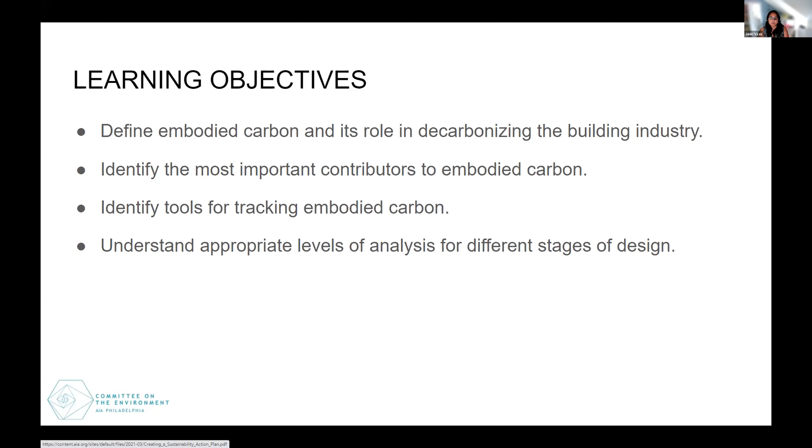So we have 3 speakers today. We're gonna give 20 minutes for the embodied carbon 101 section, tools for tracking, and then we have a series of project examples that help illustrate how to get started with embodied carbon. And then we're going to leave the last 15 minutes for questions and answers. So if you have any questions, you can put them in the chat box at any time during the session, and we will do them at the end.

So our speakers today are Stephanie Carlisle, a senior researcher at the Carbon Leadership Forum. We also have Kayleigh Houde, who's an associate and computational community leader at Buro Happold, and she's going to be presenting the BHoM tool, which is spelled BHOM. And lastly, we have Devki Desai, who is actually a structural engineer at HOK. And with that, I'm gonna stop sharing.

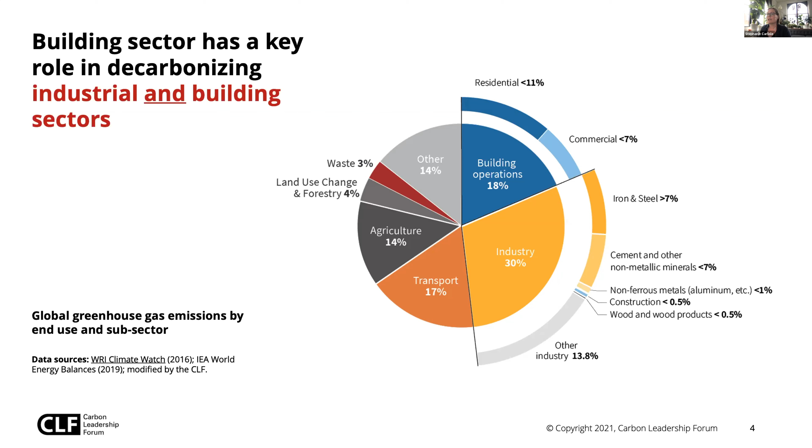Reducing embodied carbon is also urgent, and we really don't have any more time to be taking these emissions for granted. So while architects have long focused on reducing operational energy of their projects, and hopefully now are paying much closer attention to operational carbon and fuel choices more broadly, embodied carbon has really been pretty overlooked by most practices. And I think for a lot of designers, this is a fairly new topic.

But it's simply the case that in order to meet or even come close to any global targets of holding off 1.5 degrees of warming, or even 2, 3, 4 degrees of warming, we must reduce those embodied carbon emissions immediately. So not in 2050, not at the end of our building lives, not after years and years of energy reductions, but immediately.

So it puts extra pressure on this question that often is talked about as the timescale of carbon. The concept being that emissions we put into the atmosphere right now matter a lot, and arguably matter much, much more than emissions 10 years, 20 years, 30 years out. So I don't mean to say that operational carbon is not important. It is, and it is essential that we get the energy consumption and the resource use of our buildings down.

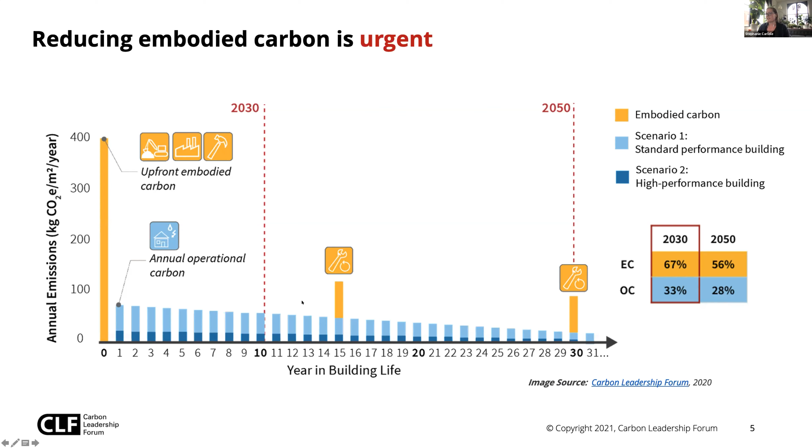Third, I just really want to underscore that embodied carbon is also a really, really important climate justice issue. Embodied carbon disproportionately impacts frontline communities, poor communities, communities of color. When we work to reduce embodied carbon, we're also working to eliminate the environmental and public health burden placed on frontline communities that suffer most, both from the global impacts related to climate change and the local impacts related to fossil fuel use in transportation and manufacturing across the construction supply chains, like smog and diesel emissions. So whether American communities or global communities in American supply chains suffer, we're accountable for those negative and sometimes deadly health climate impacts as well.

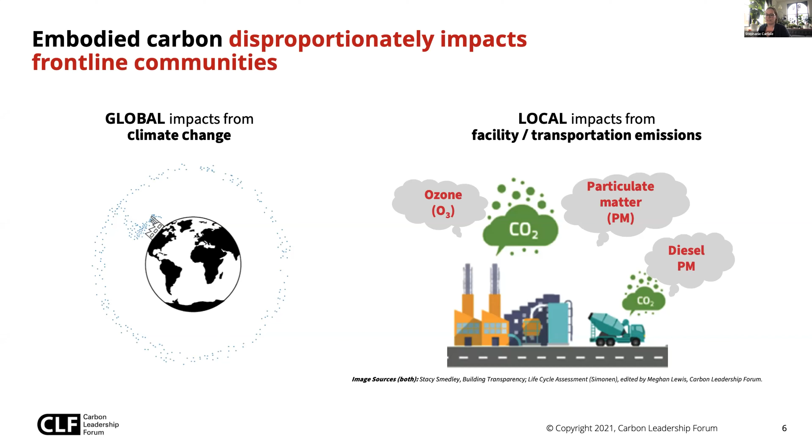Luckily, there are a lot of strategies at our disposal and a lot of things that you can do on every single project that you work on to address embodied carbon in your work. On any given architectural project, you have the ability to make use of and explore all of these strategies that I think we're going to touch on today in the different project examples you're going to see. I break them down here into 3 main buckets. They're a little squishy.

You could break this down a number of ways, but you can think about first ways that you might optimize for carbon on the whole project. So these are questions and thinking you're going to do generally pretty early in a design project, and that's making use of strategies like really just using fewer materials. So building and material reuse, reduced floor area, design for disassembly, thinking about what the flows in and out of the project are. And we could put that under that category of building and material reuse or right sizing.

Second, we have a whole bucket of categories around optimizing the systems and construction typologies. That's where we're exploring alternative materials, so low carbon materials like bio-based products and assemblies, as well as, again, thinking about the material efficiency of what we are actually building with. And generally, we're going to be making use of whole building life cycle assessment during that phase to explore those types of strategies.

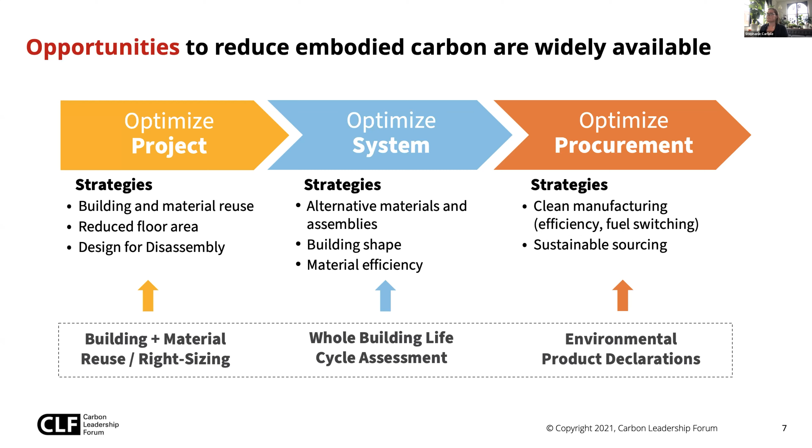I don't have time to, and I hope that in another session we can really talk about policy and how this is spreading across the whole industry and the whole country. But I just really wanted to touch on the fact that in North America, there is a growing body of embodied carbon policies that are requiring reductions in embodied carbon on projects.

So we really hope and encourage that architects and engineers and consultants can really take leadership on this topic. But it's important to know that if we don't, we will largely be regulated into this. So there's a lot of different approaches that are being pushed and a huge amount of momentum that's growing in terms of figuring out how to really compel design teams to address this area, because the voluntary pathway hasn't really been working, to be frank.

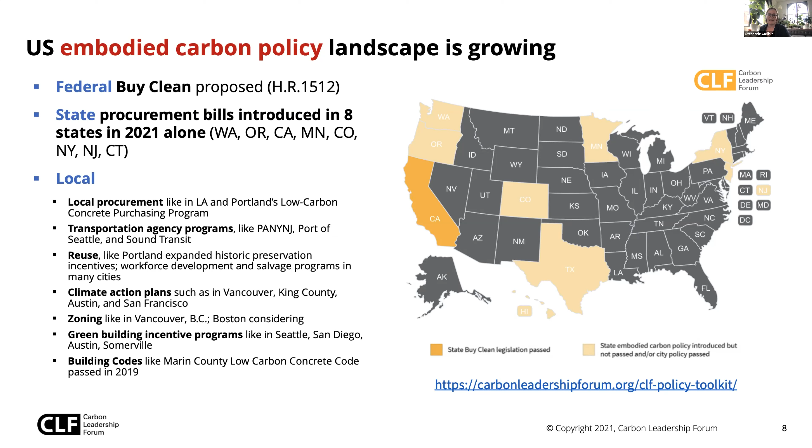But in general, we could break down these different strategies, and I think we're going to cover both of these with all of the speakers today. I generally think of a building approach, which uses whole building LCA tools or early design estimators, and a material approach. If we really want to simplify it, and it's really not an either or. I would encourage project teams to start thinking about which one they can make use of, which tools can support these workflows, but also how to make use of both, and which strategies are really going to empower you to make a difference on your actual project.

Whether that is embracing low carbon concrete specifications and writing those into your design documentation, or doing early phase analysis and comparative analysis and really making perhaps even more significant embodied carbon reductions on your project. But I think both are really valid, and both are things that we're going to address on this call today.

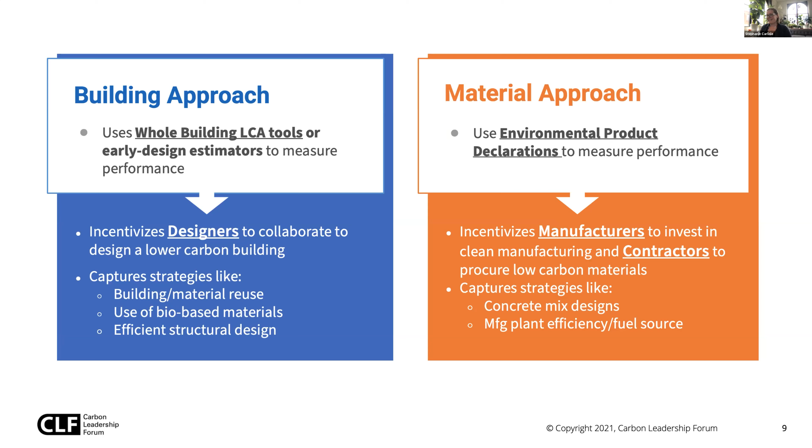Okay, so that is a very fast overview of what embodied carbon is, how we talk about it, how we report it, and getting some of the terms out of the way. So I now want to spend just about 5 or 10 minutes talking about life cycle assessment. So how do we actually measure embodied carbon? And what is actually happening in these software tools? Where does the data come from?

So the way that we talk about and evaluate embodied carbon on design projects, as well as across lots of other industries, is a practice called life cycle assessment. Life cycle assessment is an analysis practice. It's been around for about 40 years, so it's not new, but it's quite new to our industry and the design community. So LCA, what's happening within these models, is an evaluation of all the inputs, outputs, and then the potential environmental impacts of a product system across its whole life cycle.

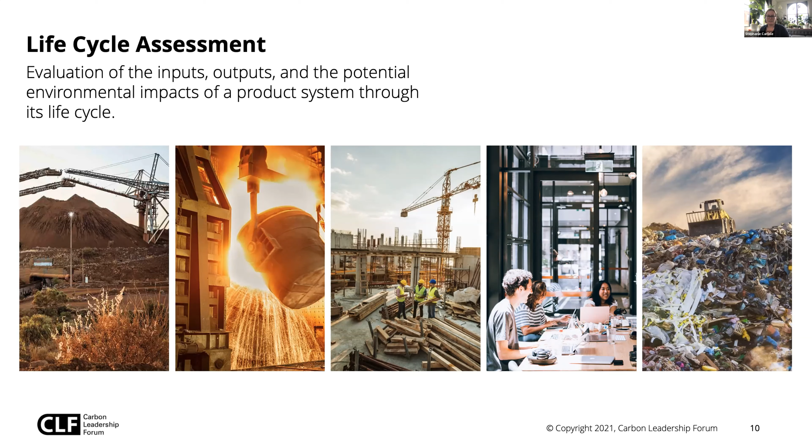So like I said before, that's going to start all the way at material extraction, look at manufacturing, construction, use, replacement, et cetera, and then also allow users to think about end of life, design for disassembly, material recovery, et cetera. So another way to think about that whole process is what we call life cycle stages. This also is a really good vocabulary to start getting comfortable with, because it's how we report carbon across a building project. So we tend to break up these models, and all of the tools that you might use will do this a little bit differently, but we'll use these standardized life cycle stages, which are set by the ISO standards.

And you'll start seeing these terms when you're looking up embodied carbon data. So material manufacturing, that sometimes people use the shorthand of A1 through 3. That's generally what is covered by a lot of environmental product declarations. And we would tend to refer to those as cradle to gate assessments.

So that's just going to look at how is this material made and what were all the impacts associated with it up until it leaves essentially the point of sale. So this is not including the full life cycle of the product. When we move into a cradle to grave assessment, we're really looking at all the materials, energy, water, all of those impacts associated with this full life cycle.

So that would include construction, it would include use, end of life, and then this lovely category called Module D, which allows us to think outside of our individual projects. And you take all of those inputs and outputs in the model and then think about and allocate the different impacts in terms of their emissions to soil, to air, to water.

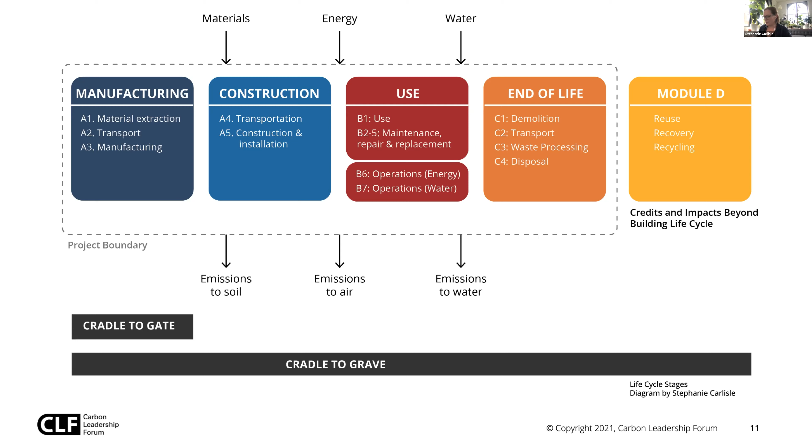And in general, underlying these different processes is some pretty simple accounting, right? But the devil's in the details. So what you're really doing is gathering an inventory of all the materials in this whole building or a product or assembly, multiplying it by the impacts and getting a total of environmental impacts. So sounds simple, but when we think about the complexity of how buildings come together, this form of accounting is obviously much more complicated.

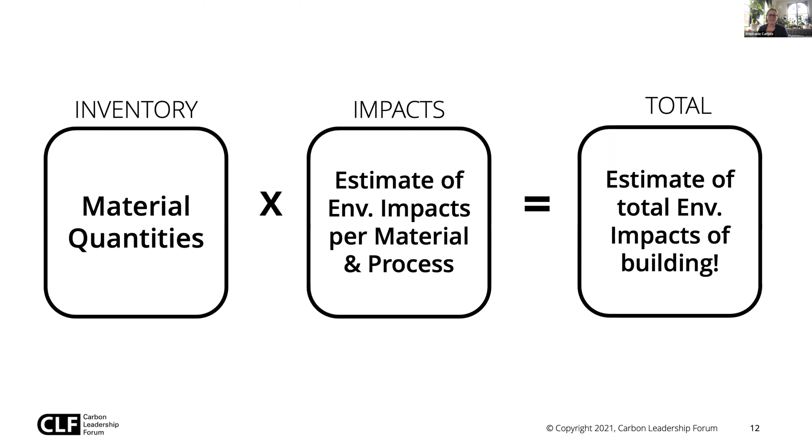So just to walk you super quickly through what's happening in the background of a lot of these data and tools that the other presenters are going to talk about is really this process of inventory and impacts assessments. So the first step is kind of moving from chemicals to materials. The diagram on the screen is giving an example of how we track in the background data all of those different processes that go into making what look like pretty simple products.

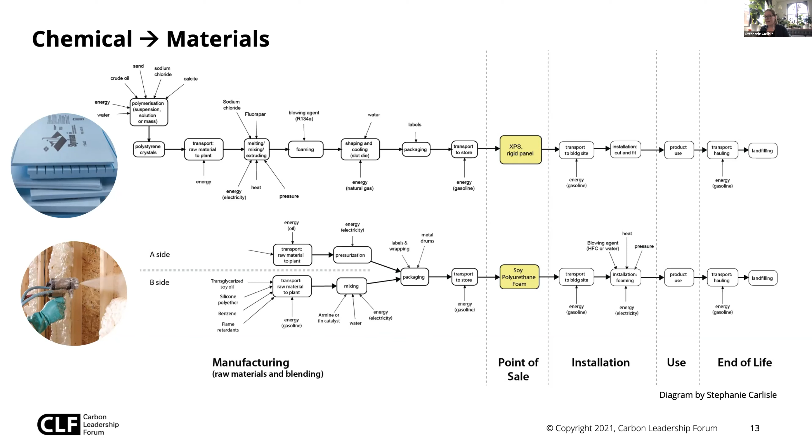So this is a comparison of some of the system processes behind an XPS rigid panel versus a soy polyurethane spray foam, for example. So it's a good example because it's one where the elements that are huge contributors to climate change or global warming potential can happen at different points, right? We want to make sure that we're thinking about those really, really carbon intensive blowing agents like R134a that are happening with the XPS manufacturing in the factory. But we also want to think about the blowing agents that are happening on site with spray foams, for example. So LCA tools are going to help bring all of that information together.

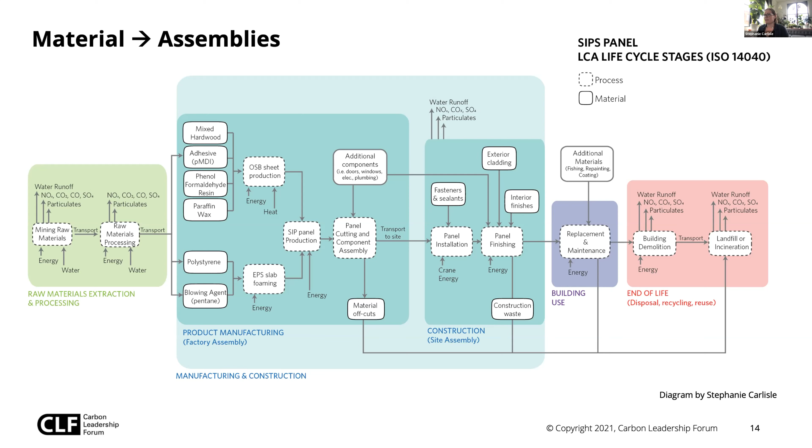The next step often is that we don't just pick materials or individual chemicals, but we're also thinking in terms of assemblies. So LCA databases and tools are going to help bring all of those different materials together. So this is a diagram of an LCA model built up of a SIP wall, pretty simple multi-material assembly. And similar to the way we can think of other types of performance, we're also going to start thinking about that in terms of the flows and all the environmental impacts associated with how all these individual materials come together.

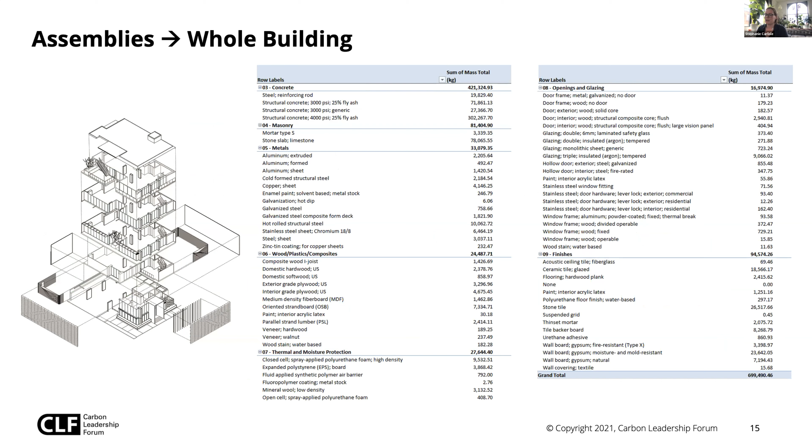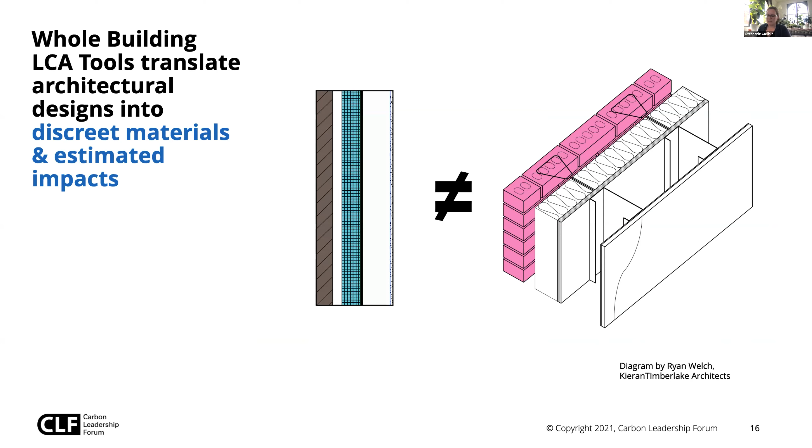And finally, when we're thinking about whole building LCA, what you're ultimately getting to by using design integrated tools really is getting accurate, quantified material estimates or a bill of material of all of the different materials coming together in your project, right? So fundamentally, what most LCA tools are doing is actually helping designers make that translation, right? Between the way we draw assemblies, the way we specify or think about assemblies, and all of the different actual quantities of materials behind them so that we can do robust analysis.

That's really the fundamental work of tools like Tally, of OneClick, or Athena that are going to help architects make those translations so that you can get environmental impact data right in your design tools and not have to be doing all of the background modeling or doing all of that quantification by yourself.

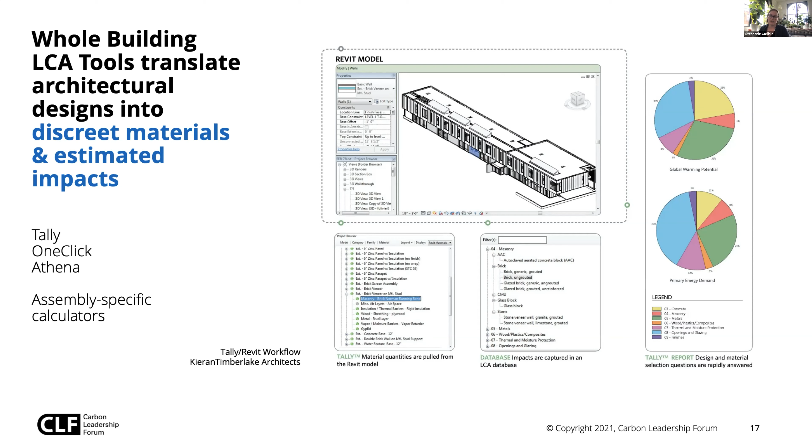So I think we'll show a couple different examples of what that looks like, but there is a really diverse range of tools that are starting to aim to meet every design delivery pathway and design process that designers are doing. Whether you're in an integrated Revit workflow, a Rhino integrated workflow, or working out of spreadsheets, hopefully there's a tool that you can start looking at embodied carbon in your projects.

And finally, I just want to mention, maybe this will come up in the examples or in the Q&A, one huge topic that folks are really grappling with when they're new to LCA is, what do I measure, right? A huge differentiation between different tools that are available also has to do with scope and the scope of assessment or the system boundary of some of these models. So some tools are really just looking at structure.

Many folks who are doing whole building LCA are extending that out to look at structure, at enclosure, at interiors, and other kind of elements that are starting to join the fray, like looking at building systems and MEP, site work, landscape, et cetera. So I think the practice of LCA needs to become more accessible through tools that are easier to use, but also tools that cover a much broader system boundary, because we really can't know which elements of our projects have the most impact or where we have the best opportunities if we're simply not measuring or modeling those building systems.

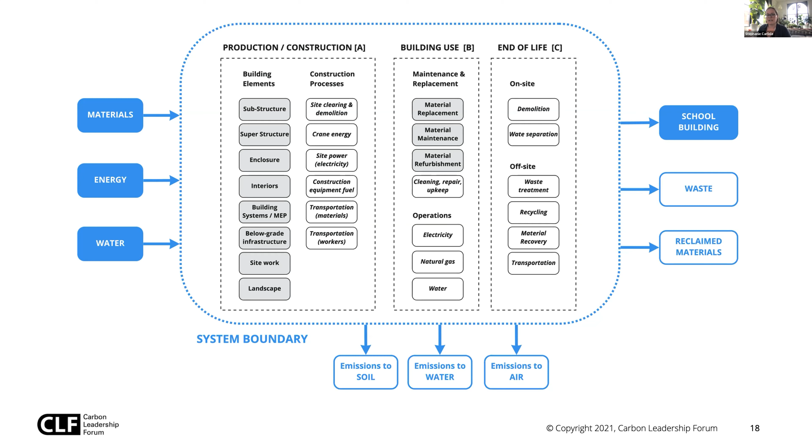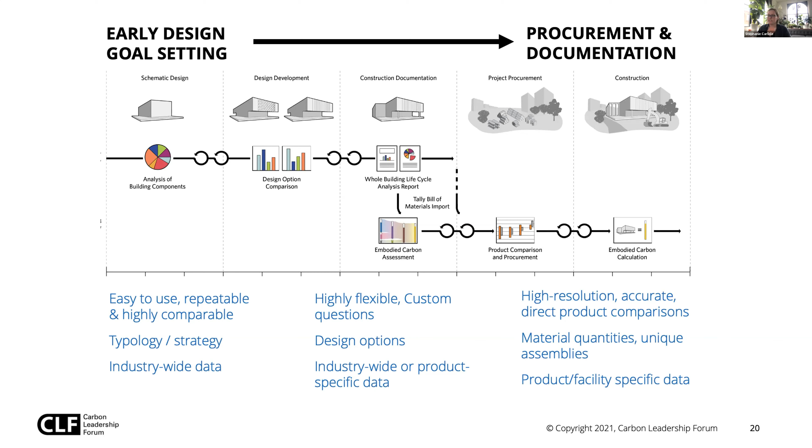And finally, I just want to end with this little breakdown of how really what we need to get to is a workflow in which embodied carbon questions are not asked at the end of the project, but similar to the way I think you're building a conversation in this group about energy modeling and other forms of analysis, something that tracks through the entirety of the project. Early on, you want to be using tools that allow you to set benchmarks, to ask questions really early in the design phase, to think about where you're going to have the most impact on your project, to do hotspot analysis.

During design development and construction documentation, you're getting much more detailed and thinking about optimization and really tracking all of those different trade-offs between embodied carbon and operational carbon, and then really hoping to get more and more practices to that space where they're taking those design models and analysis and putting it into the documentation for their project, making sure that if you have great ideas and concepts about embodied carbon reductions, that they actually get built, right? So that's really getting into that world of specifications, tracking, reporting, and disclosure.

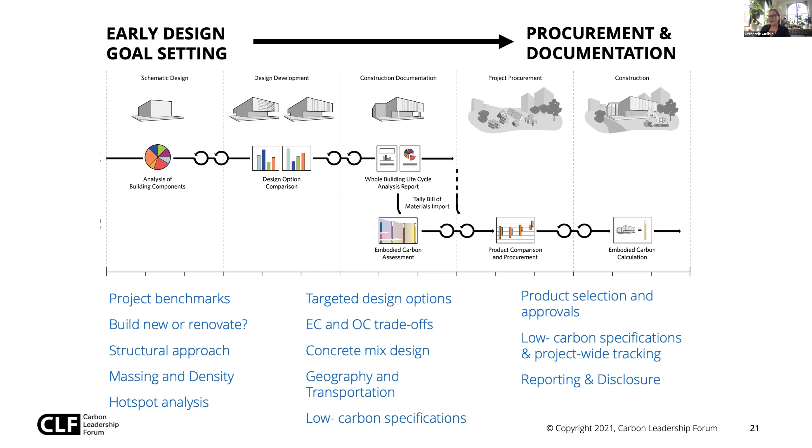All right. So Steph, great intro. And I think you actually listed more tools than I even have on the slides here, but there are more coming out every day. So as you saw on Steph's slide, there are so many different tools that we could potentially look to start doing LCA studies, but you might say, okay, so where am I supposed to start? What's the right tool for me? Hopefully we give a little bit of detail about each of these tools.

So some questions you might have is, what's the cost associated with the tool? Where does the underlying data come from? That's a really important question in this space. When in my project should I be using different LCA tools? Like Steph mentioned, it's better to do it at the beginning of your project when you can have the most impact versus when you're past CDs and you're just wrapping up analysis at that point. So better to do it earlier on. Some tools are better for that than others.

Which life cycle stages am I interested in studying? So like Steph mentioned, A1 to A3, that's usually what EPDs cover, but it's an important question to take into account. And which environmental impact categories am I interested in studying? Am I just interested in global warming potential or embodied carbon, or am I interested in all of them? So those are some of the questions that you may start off with.

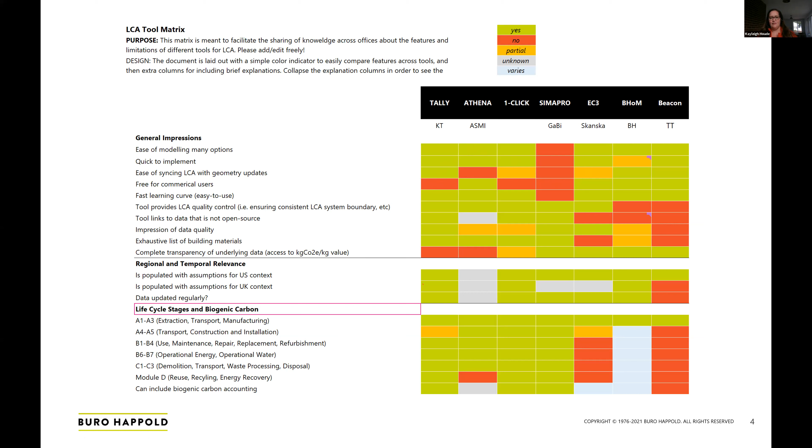And we tend to look at different decisions here in terms of where the data came from. Is it specific to the US or the UK, since those are our two main offices? Is the data updated regularly? Which life cycle stages does it cover? So this is just a bit of looking into how we choose to do LCA studies and looking at all the different tools.

But if we start to look at the macro level, one tool that's very close to home for Philadelphia, obviously, is Tally, originally created by KieranTimberlake, which is local to most of you, which is a great tool because it's integrated with Revit, which makes sense for so many of our workflows. It allows you average values with some customizability, informing those big picture designs on your project. So earlier and earlier, we're starting off with a Revit model, so it makes sense to have a tool that's sitting there to help you make design decisions, and it's very much a plug and play type of system. So Tally is a great one to start off with.

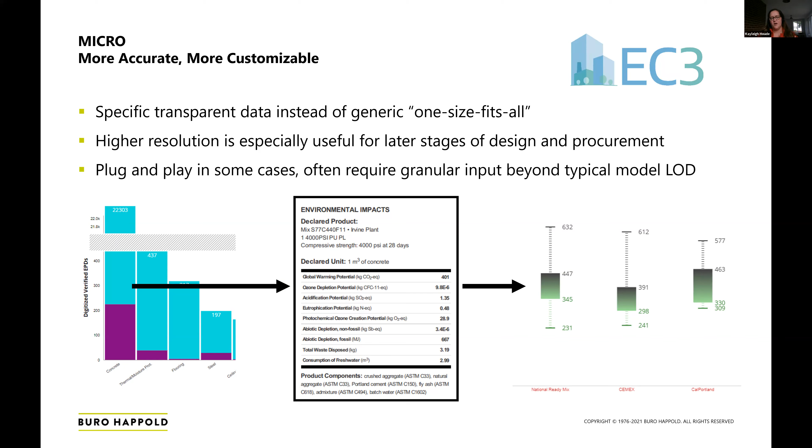Also, if you're interested in looking at more micro, object by object types of decisions, EC3 is a great one, recently integrated into BIM 360 through Autodesk. So this allows you to look at individual products. So it's very specific, and it allows you higher resolution of those individual cases, let's say one concrete versus another, one manufacturer versus another, but allowing you to see those industry average values as well as where the individual products fall, which is very useful.

Also, OneClick LCA, we actually see a lot of our UK folks use this tool in our sustainability and physics group. This allows you very specific data sets, a wide range of data sets, lots of different regional ones. I know there are a lot of French EPDs in there, but this one again is very much plug and play, very specific to the products that you're specifying, and it actually does include scopes like MEP, which is valuable.

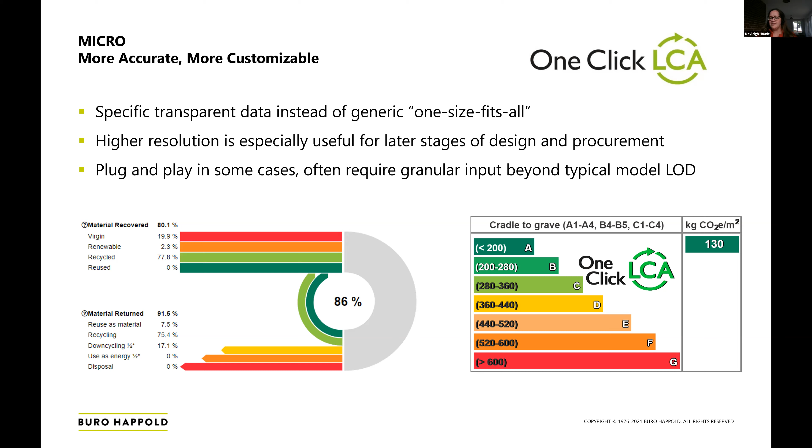But again, each of these tools takes a slightly different methodology on what Steph showed is a fairly simple calculation. It's just more a matter of what are you trying to study? What's the data that you're trying to look at?

And then BHoM, which is the Buildings and Habitats Object Model, is an open source tool that was created by Buro Happold, open sourced a few years ago. This is a fully customizable tool that's able to be used whether you're modeling in Rhino, modeling in Revit, or even you just have an Excel spreadsheet of your different quantities.

It's capable of accessing a variety of different open source data sets. So EC3, Ökobaudat, which is a German data set full of information, Quartz, which was a project by Google Flux a number of years ago. Lots of different types of data sets being integrated there, but it allows you very much object by object, you're seeing what you're attaching as EPDs.

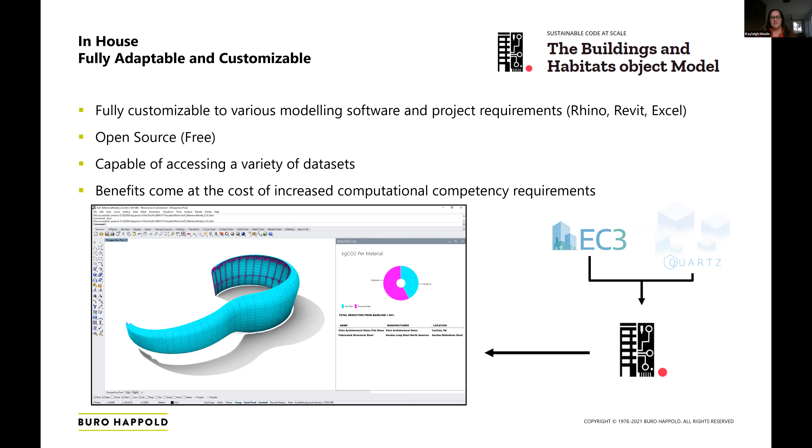The use of this tool in particular comes at the increased cost of computational competency requirements. So if you love Grasshopper, or you love Dynamo, or you're really interested in assessing an early stage Rhino model, this is the right tool, but I would say that it is more complex in some ways and easier in others. So I'm going to go a little bit deeper into how the methods are set up here, just so you can see kind of the underlying logic, which would be the case for any of these tools. But since this one is closest to home for me.

So what is BHoM? It's an open source, so free means of accessing collective industry expertise through computational methods. You'll see them as nodes in Grasshopper, Dynamo, or Excel. We have 30 software adapters that allow interoperability. So if you're trying to go from Revit to IES to do an energy model, there are interoperability forms of doing that. Adapters are what we call them. So that's part of what BHoM does. We also have individual toolkits like the LCA toolkit that allow us to solve wicked problems like climate change.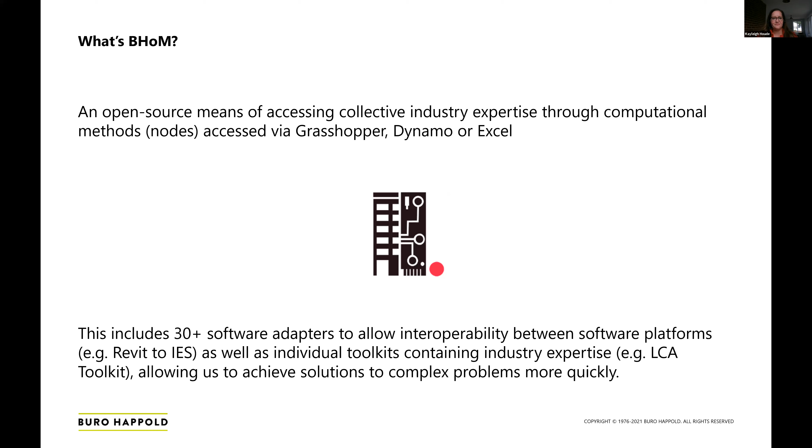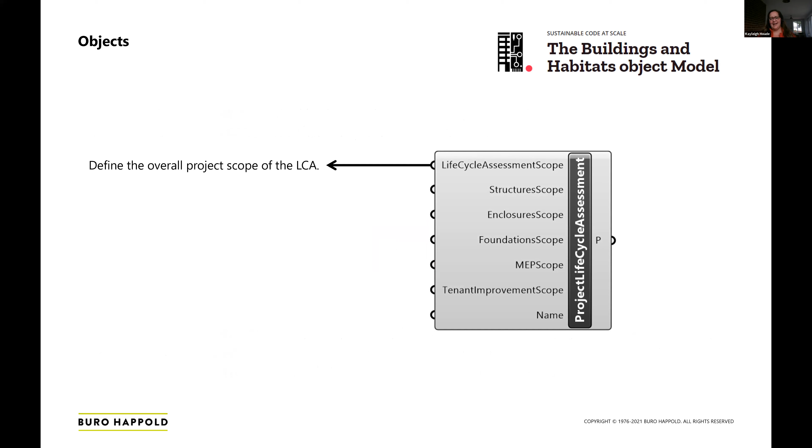So starting to look at what this might look like, please don't be scared if you hate Grasshopper or hate looking at nodes. But something like this is how we look at the whole project lifecycle assessment. So a lot of the times we were looking at these kind of benchmarking studies and saying, what level of LOD was that project that that benchmark was based on? And there wasn't enough data to give us that information, or where was the project located? What was the type of project? Those are usually included. But things like, which primary structural material did you have?

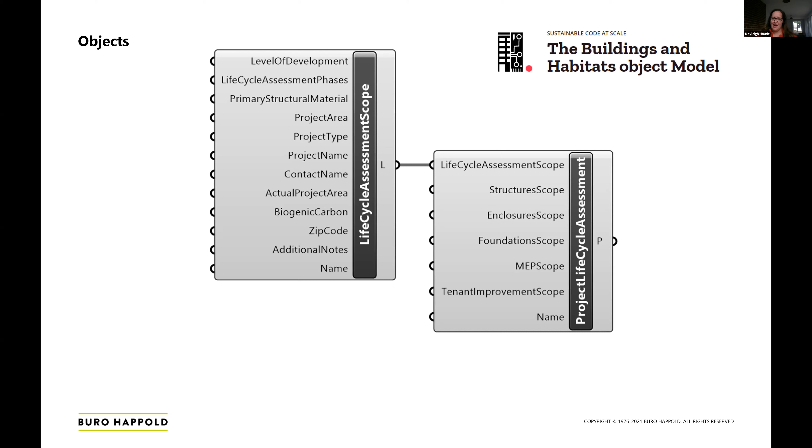A lot of those important questions, we tried to get those down into our LCA scope here so that when we were comparing projects later on, we would know they were apples to apples and you weren't comparing the wrong things. We also were very specific about the way that we were quantifying each of those different scopes of work.

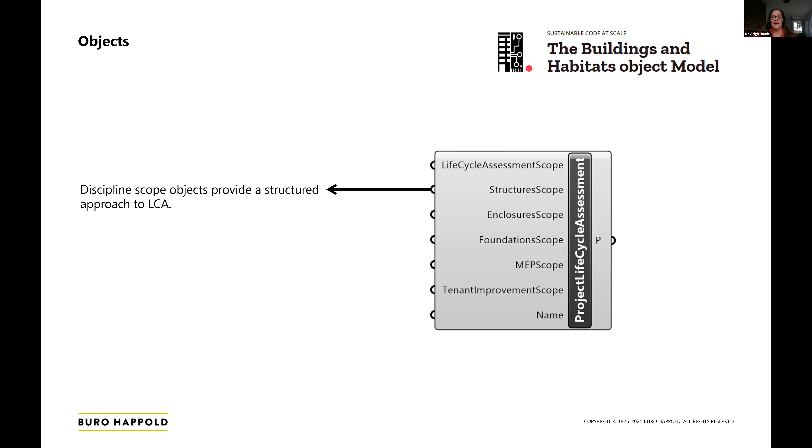So if you do an LCA study by the book, structures, foundations, and enclosures are kind of the top 3 bits, since they tend to cover, I think, the majority of the embodied carbon of the building. They're the highest mass of the building. So those tended to be focused on, and MEP and tenant improvements kind of forgotten about, but we have included them in our methods just because it makes sense to have everything there. If you have it, you may as well study it.

So for structures, slabs, core walls, beams, columns, easy. Structures, such an easy scope to be able to cover. You have so little to cover there, and it's so high in volume that it tends to be the highest embodied carbon. But then if you start to look at all of the different pieces here between structures, foundations, enclosures, MEP, and TI, you're seeing the rest of the building kind of come to fruition, and you can start to focus on other bits like ceiling tiles or finishes, and MEP looking at refrigerants and ductwork and piping. So being able to look at the holistic picture here. Again, we wanted to be very specific about what was included in these studies.

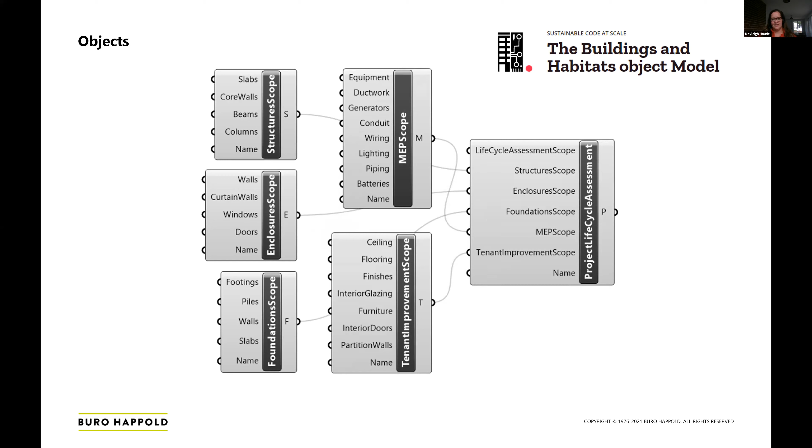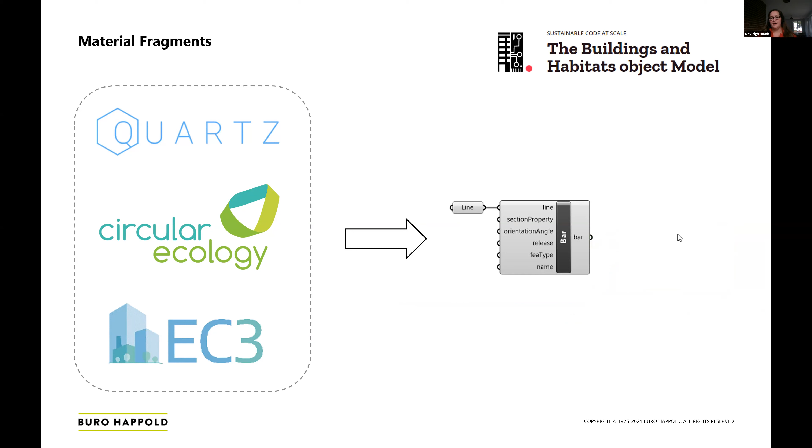And this is just showing you how you would actually start to have your objects, so something like a bar or a beam, and you're actually attaching the data, the EPDs, to the individual object. So this bar would be plugged in as an object here, and then the fragment that's attached to it, that is the actual EPD. So this is EC3 concrete, 0 to 2500 PSI in strength. So actually taking those objects in your model, so floor, column, a wall, a beam, a duct, and attaching the EPDs to them so that you can work with them through the rest of the LCA study.

Each of those EPDs is then broken down into a common language. So these are all the properties that an EPD usually contains. Each of those has a quantity type associated with it. Am I measured by volume, meters cubed? Am I measured by mass, just kilograms? Everything is in metric, which is nice for us all to speak one language, except for Americans. So a little bit of a learning curve, but that's kind of across all EPDs as a whole.

Also just looking at which life cycle assessment phases are covered, generally A1 to A3, because that's all the manufacturer can control. We also have things like descriptions, the amount of global warming potential, the amount of eutrophication potential, anything that was contained in the particular database.

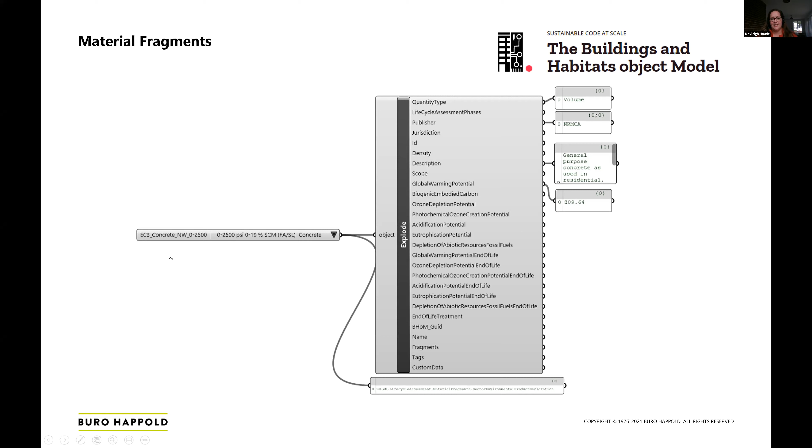And then you want to look at the level of granularity that you have on your project. So if you're really early stages, projects in the US, you have a Rhino model where you have mass-based geometry, applying something like the Quartz data set, which is really rough, regional, industry values rather than a very specific manufacturer's product. It makes more sense to apply that type of data set at early stages when you're comparing massing versus massing, or you don't want to get to the specifics of a particular type of concrete necessarily. You're saying concrete or steel, those larger picture decisions. So Quartz is great for that.

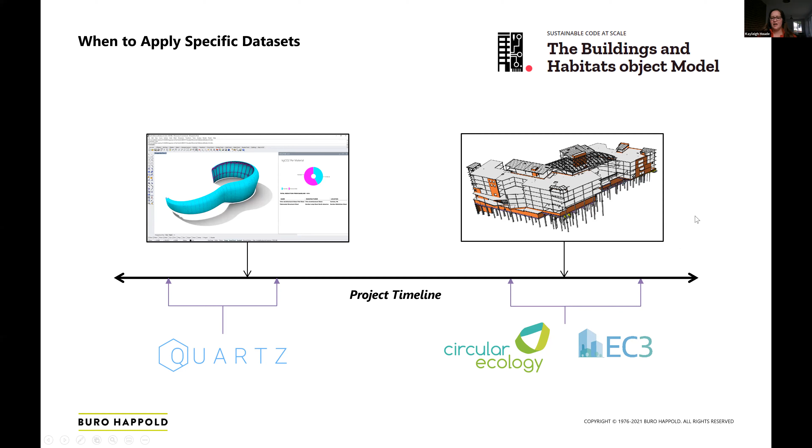And then once you start to move further along into DD and CD, when you have a more fleshed out project, using EC3 or One Click LCA, something like that makes a little bit more sense. So in terms of how you would actually assess the life cycle assessment, you can do that by individual object. So column versus column, one is bigger than the other, so it'd have more embodied carbon, or scope. So structure scope versus structure scope, or structures versus foundations versus enclosure. Where should you be focusing your energy and your decision making? And then finally, evaluating the entire LCA once you have all of those scopes pinned together.

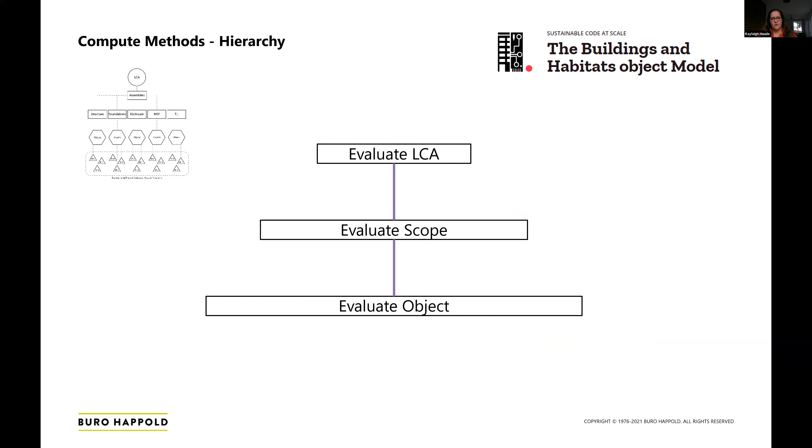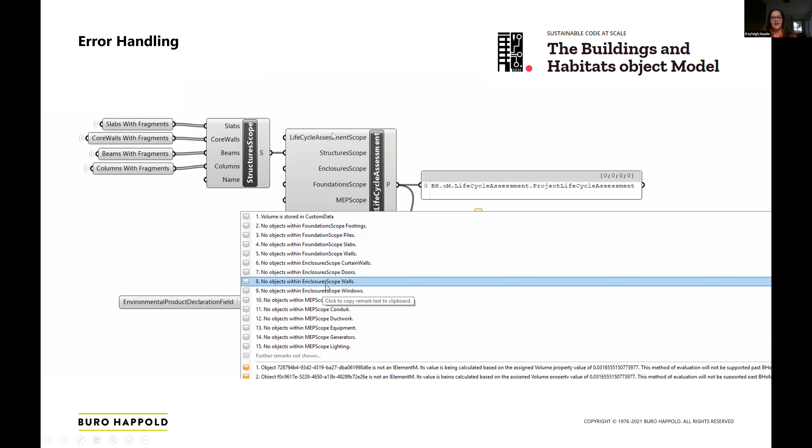So that's what these look like in the individual little nodes there. We also have lots of error handling here. So saying, hey, I didn't actually find any foundation scope piles in here. I didn't actually find XYZ, whatever you didn't include. So making sure that we're very aware of what we didn't have as a part of the project is really important. Again, when you're looking at benchmarks, it's important to know, hey, they didn't actually include their slabs for structures. I don't want to compare myself to that particular number.

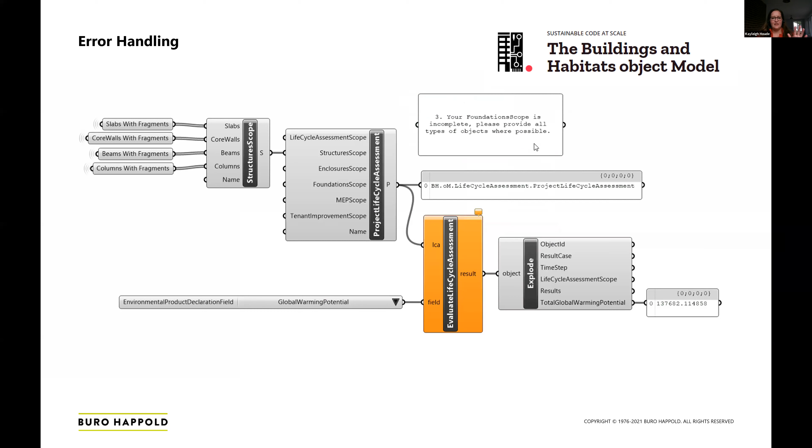I think we get so hung up on numbers sometimes as an industry and saying, well, what am I comparing this to? Well, you want to make sure you're comparing it to a similar size project, similar scope being studied. So if you did include MEP, you don't want to be penalized for that. So when you're comparing to another project, maybe don't include your MEP scope, something like that. But just making sure that we're aware of what can be included.

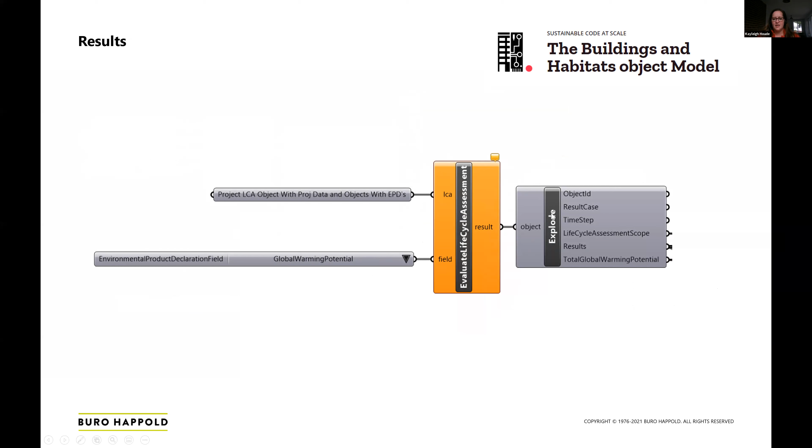And then also looking at our results here. So just plugging in the entire LCA and studying something like global warming potential. I just want to look at the embodied carbon of the overall project, and being able to look at that and actually push those out to a server like Mongo or SQL or wherever you're storing data, so that we can start to do these really interesting studies of one project versus another and start to make better decisions.

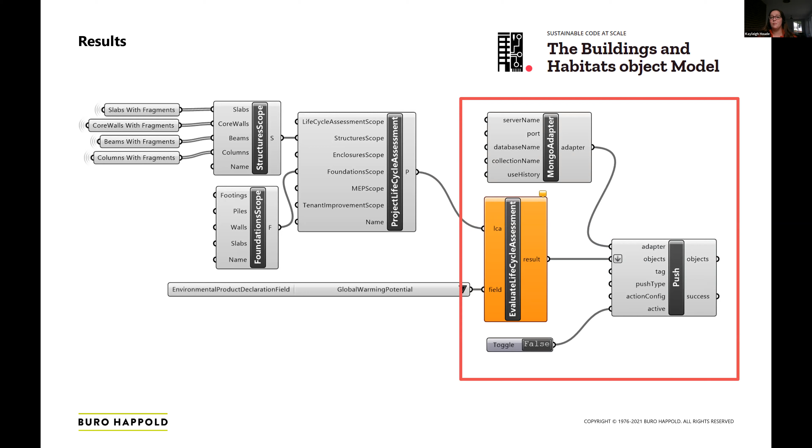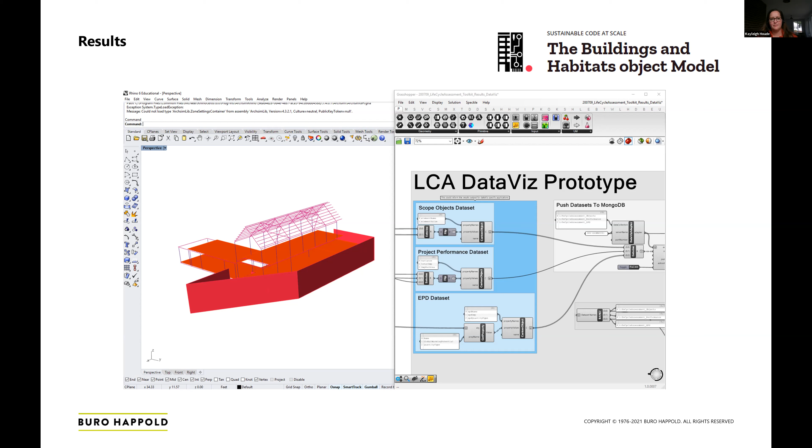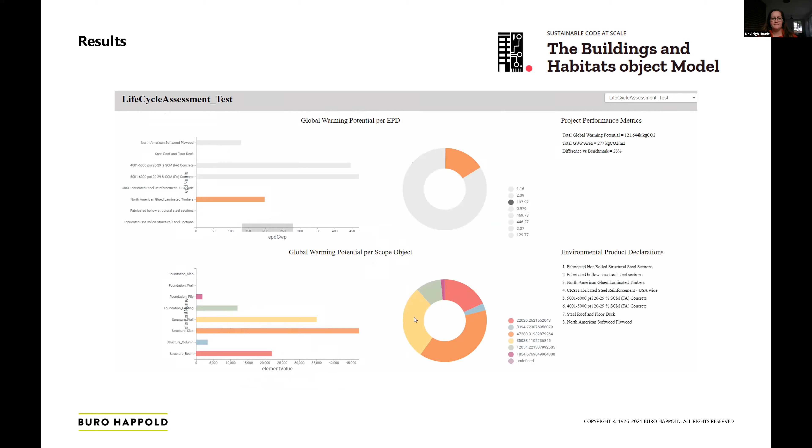And just a little bit of an example of what this might look like. This is some Rhino geometry being studied over here, and being able to give you a red, yellow, green, which we've done in some cases, to say you really should focus on the slabs, or you should really focus on the foundation walls because they're very intense in terms of embodied carbon. And then also looking at a little bit of dashboarding to see, again, scope by scope, where you should be focusing, which EPDs you're using, so that we're able to look at these on a micro level as well. That's all I had.

Thank you so much, Kayleigh. That was amazing. So on deck now is Devki, who is going to do a deeper dive into structures and different ways that they've intervened on structures projects across a couple of different examples at HOK.

So I'm going to be sharing the slides. And all right, can everyone see my screen? No, not yet. Oh. No?

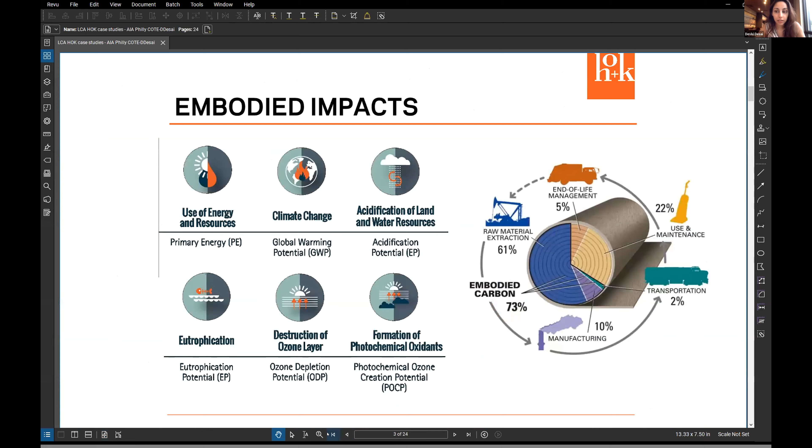How about now? Yes. All right, thank you. Thanks so much, Devki, and thank you to Josh as well for inviting me. Can everyone hear me all right? Yes? Okay, great. Okay, I apologize in advance for some background noise if there is any. I'm in a cafe right now.

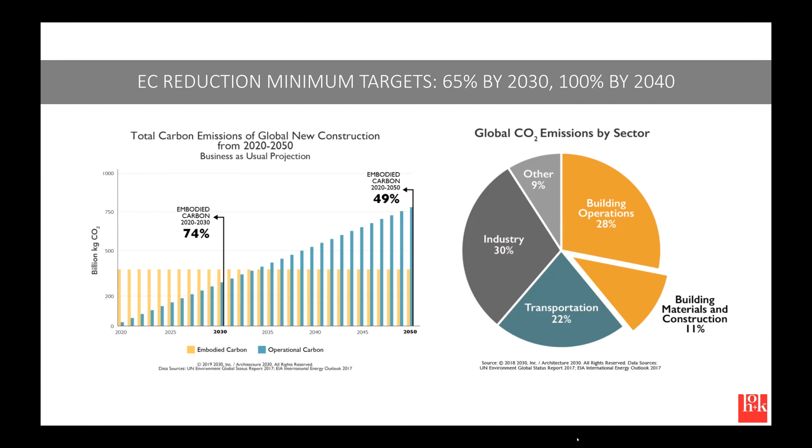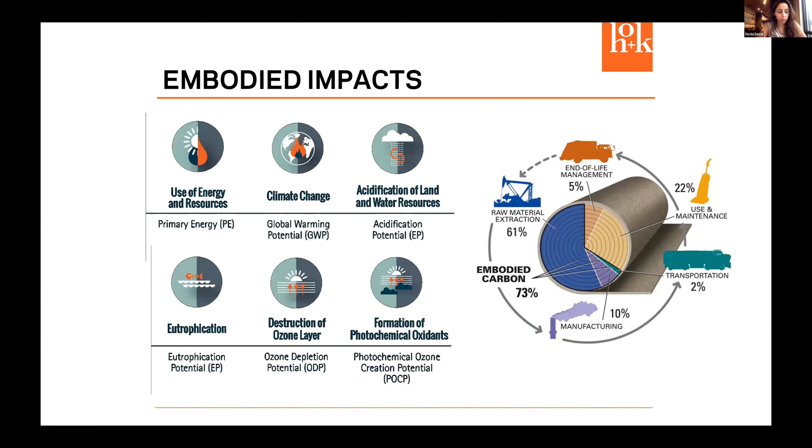Actually, Devki, I was wondering if I could request control, and maybe that'll save you from having to flip through my slides. Yeah, go ahead. All right, let's see, how do I do that? So it'd be at the top, or wherever you are. Click view options if you have that. Request remote control on the flyout. Thank you so much. All right, you're good to go. So let's see if this works. I'm not sure that's working. It might lag with the internet connection, but there you go. Oh, there we go. I'm wondering if there's a way I can go backwards to the intro. Okay, there we go.

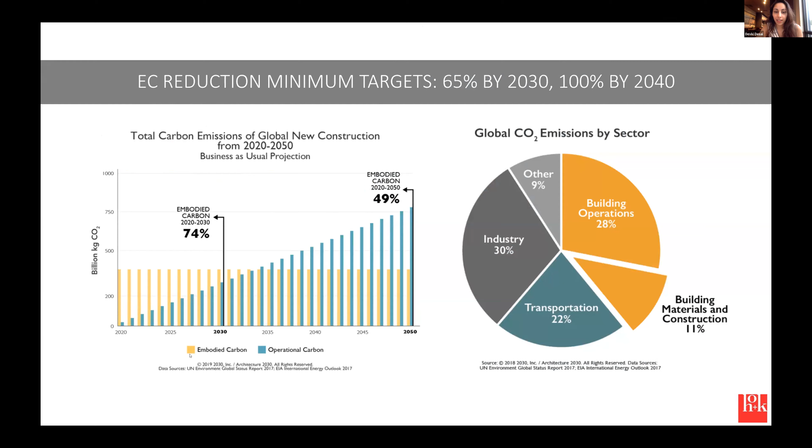So we can skip this slide because this was covered in detail. This was also covered in detail. I'm going to talk about life cycle analysis. So skipping right forward to this, this is how we think about life cycle analysis helping us through our structural projects. We are an AE firm, so we work really closely with architecture and MEP and the sustainability team. And so this is an example of how we together try to reduce the embodied carbon from a baseline. This is a graphic that I had put together for one of the clients to explain why we were doing life cycle analysis on their project.

I'm sure many of you have mulled over what you want to use as your baseline building for various projects. It's a tricky decision to make, but I can touch on it really quickly here. So you see this reduction from a baseline, and the question is, well, what is the baseline? It is defined by LEED to be a building of similar size, orientation, function, operating energy performance, but also similar typology. So what is the business as usual building that's comparable to what you're designing?

Sometimes, especially at firms that many of us work at, the project is so incredibly specific, it can be hard to nail down what exactly the baseline building is. For example, for LaGuardia Airport, or for a very specific university hospital with really stringent vibration criteria and a lot of other specific needs that we're designing to. So sometimes for projects, we choose the project itself as we have designed it at concept as the baseline from which we want to improve.

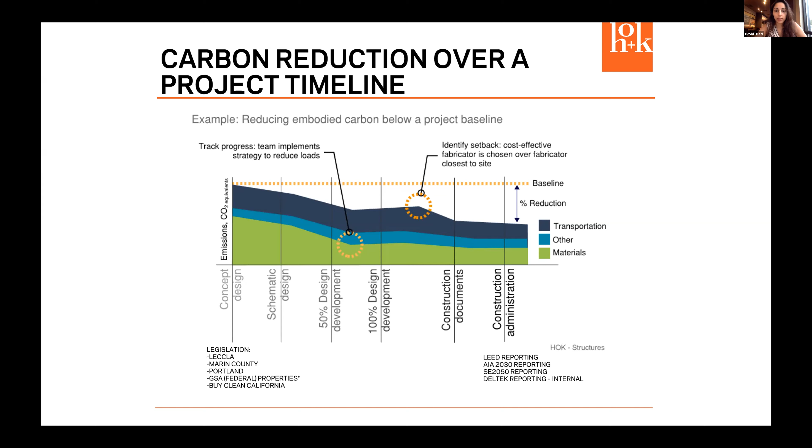And then also just to put a little bit more empowerment into your hands, you can do a life cycle analysis by hand in a spreadsheet if you so choose. So it's not something you have to rely on a black box to do for you, but we like to use these programs because it facilitates managing a large amount of data.

So we can go to the next slide. Okay, there we go. So this is just a look into One Click LCA, which is the tool we use most often. If anybody is curious and just getting started on doing life cycle analysis, we typically start with Revit if we have a Revit model.

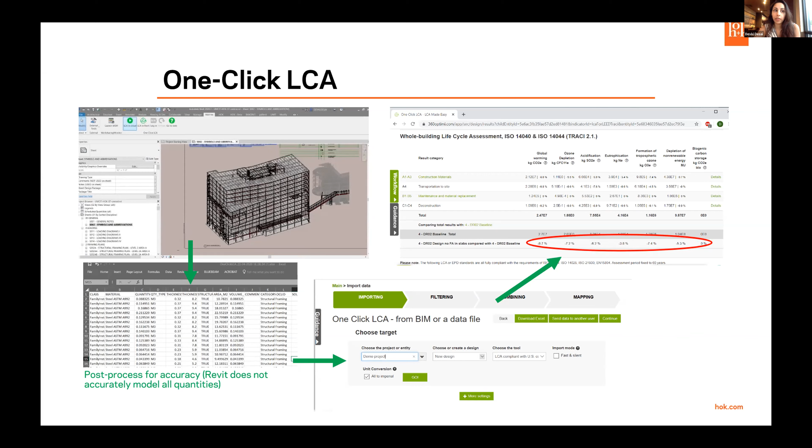If it's too early in the design process, we'll use our material quantities spreadsheet that we've likely put together for cost estimating purposes or for the client anyways. Typically you'll do this in SD. So you can start with Revit or you can start with a spreadsheet. Either way, you just format it for whichever tool you're using, you upload it, and there are various data sets you can draw from if you don't have suppliers selected yet, which early in the process, typically you don't. So there are lots of national databases with regional specific and national specific data.

So here's a quick look into where does all this data come from. Some of the data that you're using, and when I refer to data, I'm going to refer back to Steph's presentation where she discussed EPDs and the impacts, which is what you multiply by your quantities to get your total environmental impacts. So those emissions factors, which might be CO2 equivalents per meters cubed of concrete, or it might be SO2 equivalents per meters cubed of rigid insulation.

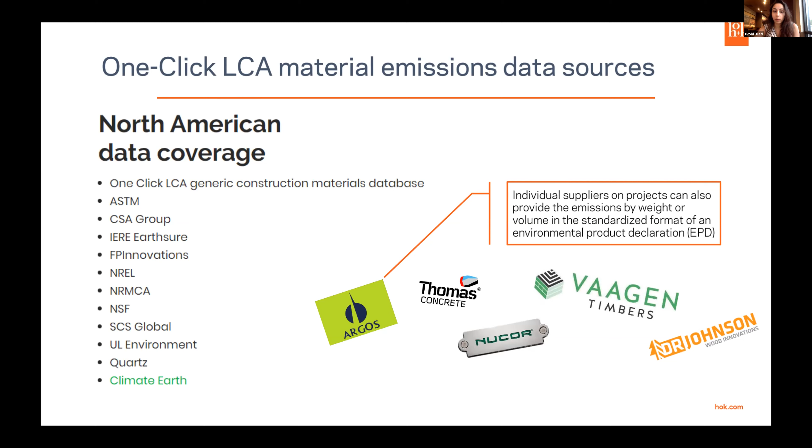Whatever those values are, those emissions factors can come from national databases like NSF, ASTM, NREL, or they can come from suppliers who have uploaded their EPDs. They've provided their environmental product declarations to the software developer. And then of course, when you get your EPD from your supplier, you can use that as well or upload it to the program that you're using.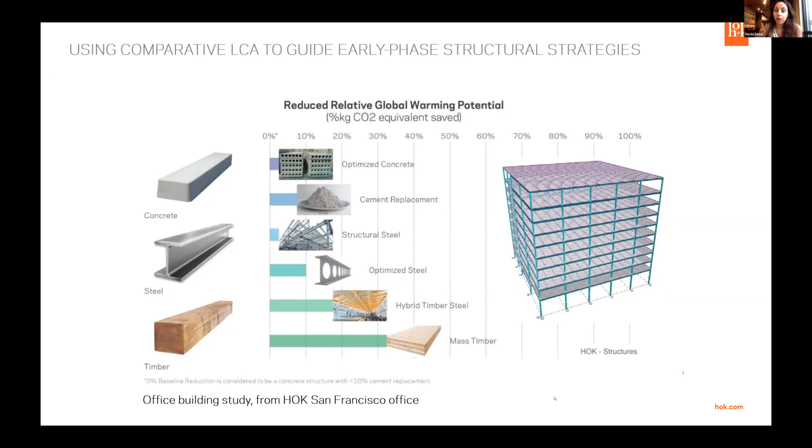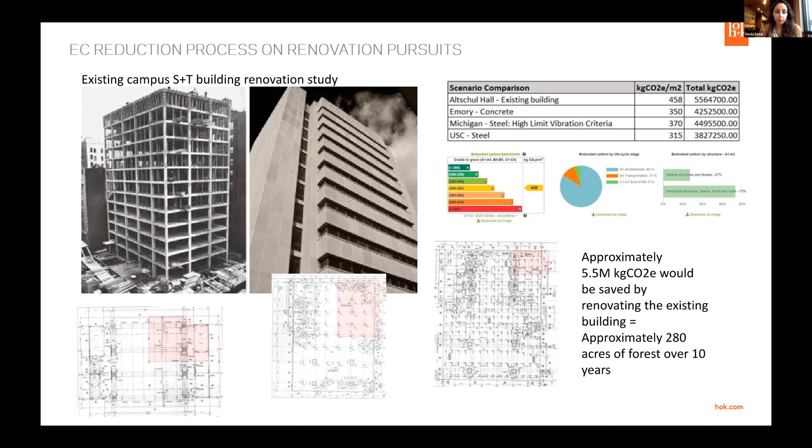This is an example of an embodied carbon reduction on an existing building. We're really trying to encourage clients to renovate existing buildings instead of starting from scratch. That's a really great way to reduce the carbon intensity of a building per unit area. So this quick study that we did for a university in New York, their campus, was that they would save 5.5 million kg CO2e just by renovating their building instead of starting from scratch. Maybe that's not what they wanted to hear. Maybe they couldn't wait to see the brutalist concrete building gone. But what we were able to calculate for them is it would be much better towards their own university carbon reduction goals to embrace the brutalism and renovate the building.

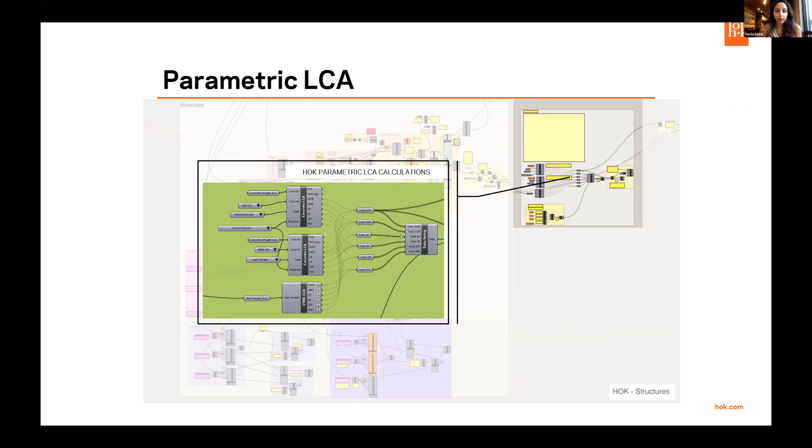So this was discussed by Kayleigh in great detail, what they do at Buro Happold. We also do parametric LCA calculations in-house at HOK. This isn't something that we have made available to the public, but this is a little glimpse into how we do the parametric calculations during concept. You have your drop-down menus of different regions and different types of concrete, for example, and your environmental impacts out.

This is another glimpse into our concept phase carbon reduction procedure. So sometimes we want to look at multiple objectives at the same time. So with a couple coworkers, I developed a multi-objective optimization tool. There are many different ways to do this. There are many different academic and professional groups who have gone down this path. And the nice thing is it provides you with a family of solutions to meet both your embodied and your operational goals.

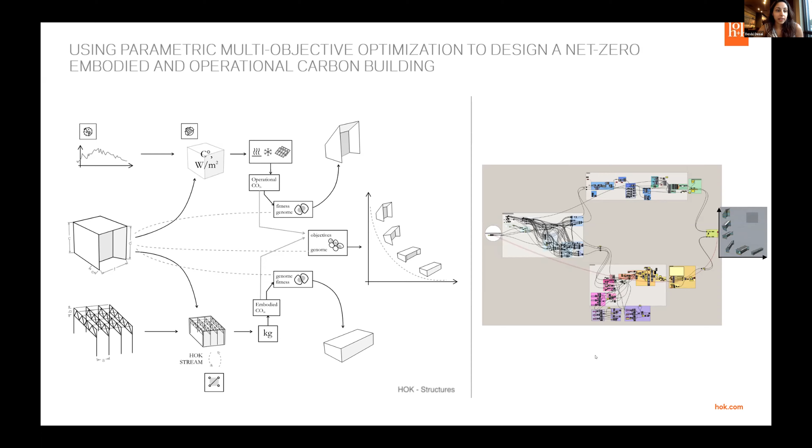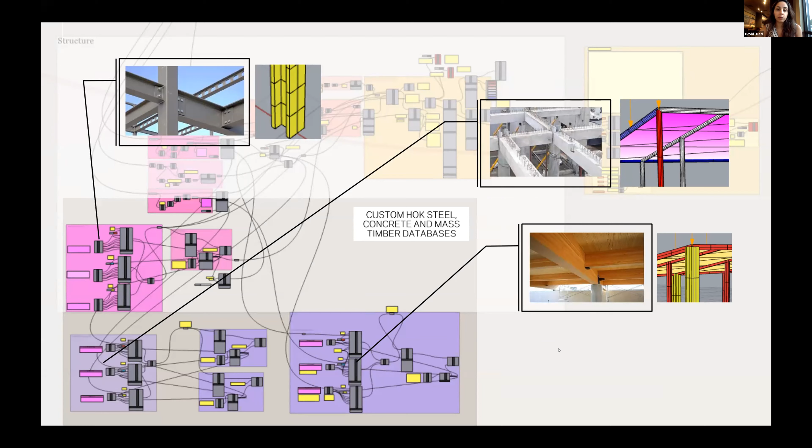So we can keep going. And we have kind of baked in some in-house steel, concrete, and mass timber databases for this multi-objective parametric tool to draw from.

So that was concept. Moving into design development and construction documents, this is an example of the carbon reduction process for a large university hospital project. This is a carbon tracker that I put together for the clients so they could see in almost real time what the implications of their design decisions were. So we're putting the power back in the client's hands to decide how they can reduce their own embodied carbon.

And oftentimes when we're working with university clients, they have really aggressive carbon reduction goals of their own that they're trying to meet. So I think this was really fruitful for them to be part of the process. What we did on this particular project is our first big carbon reduction design strategy was we collaborated with the geotechnical engineer to move from a temporary earth retention system to a permanent earth retention system. For a project of this size, that was fairly doable because the earth retention system required for construction was already quite significant.

So it wasn't that much of a jump in terms of embodied emissions to go from a temporary to a permanent system. What that did is that eliminated all of our subgrade foundation walls. It alleviated a lot of unbalanced lateral loads on our diaphragms, and it significantly reduced the thickness of the subgrade diaphragms. So that was a lot of concrete that was removed from the project by collaborating with the geotechnical engineer and seeing how better to manage geotechnical subgrade loading. So that got us from 0% to about 4%.

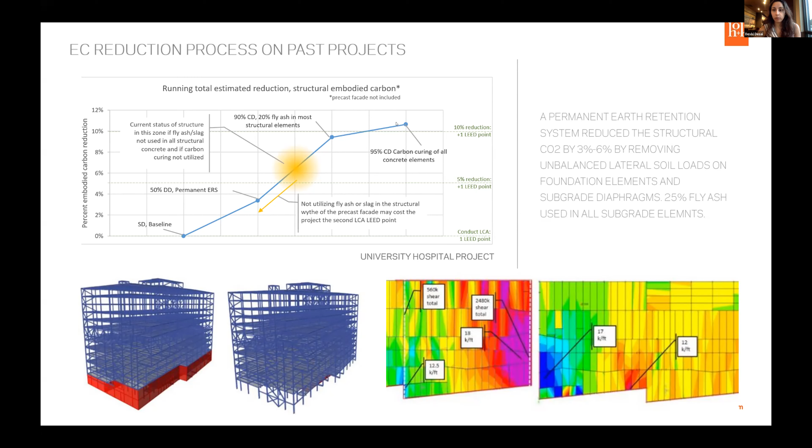And where we wanted to go from there was use a lot of fly ash, pozzolanic material like slag to reduce the cement content of all of our mix designs. So this was a back and forth between the client, the contractor, a potential supplier, discussing the pros and cons of the fly ash content of all the different mixes we had. So the final decisions got us close to 10%, and then we discussed carbon curing with the client as well. As you can see, that would have been about a 1 or 2% reduction beyond what we had achieved up until that point.

This is an example of a project in a corporate park in Texas. The reason I put this project in here was to show an example of a project where the construction type of the baseline building was very obvious. This project was in a corporate park where all of the other buildings were tilt-up concrete. So in this case, it's very clear to us that the baseline building would be tilt-up concrete, so we have something to compare to. For the previous project, it was a little bit more challenging to determine what a baseline would be that would actually meet all of the criteria that we were designing for. So we used the project itself at concept phase.

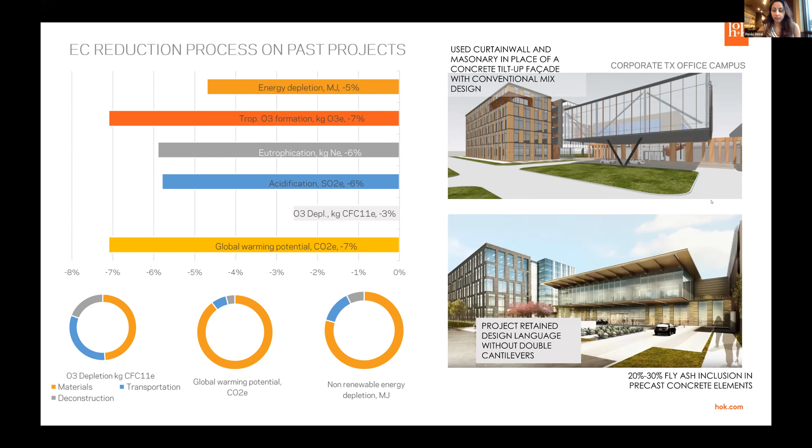Some sources of reductions here in embodied carbon were, of course, fly ash and precast concrete elements. That's low-hanging fruit. Another source are design changes. As you can see, a very aggressive cantilever in the top image. That was tempered to cantilevered canopies over an entryway that retains some of the same design language without quite as much structural embodied carbon. So there are a couple different sources here. I'm going to go to the next slide.

Another couple sources of reductions here were a geotextile membrane was used to control groundwater uplift forces. So that reduces the number of tension piles needed. That's a reduction in foundation concrete volumes. And there was also a delayed base connection construction sequence for the pedestrian bridges. That is an unexpected source, oftentimes, of embodied carbon reduction, but a lot of times the size of the foundation is significantly increased to manage temporary construction configurations. So this was a strategy to reduce the forces on the foundation, and it in turn reduced the volume of concrete required and the embodied carbon.

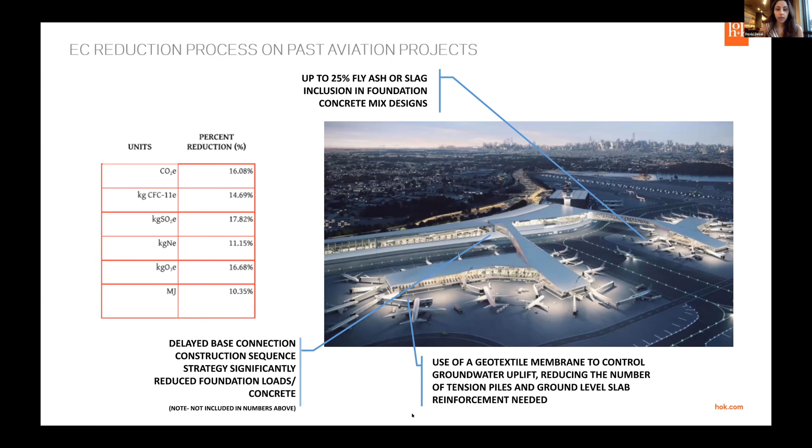So, construction administration. As I'm sure everyone here is aware, starting an LCA during CA is no one's ideal scenario, but it's never too late. You can get more reductions out of a project, even if you have to start an LCA in CA. So this is a university biological research building.

So this was a concrete building. It's no surprise that concrete is the lion's share of the embodied carbon. Oftentimes, even with steel superstructure buildings, concrete can be the majority of the embodied carbon because of cement being such a high embodied carbon material, and foundations representing a very large percentage of the total structural material quantities.

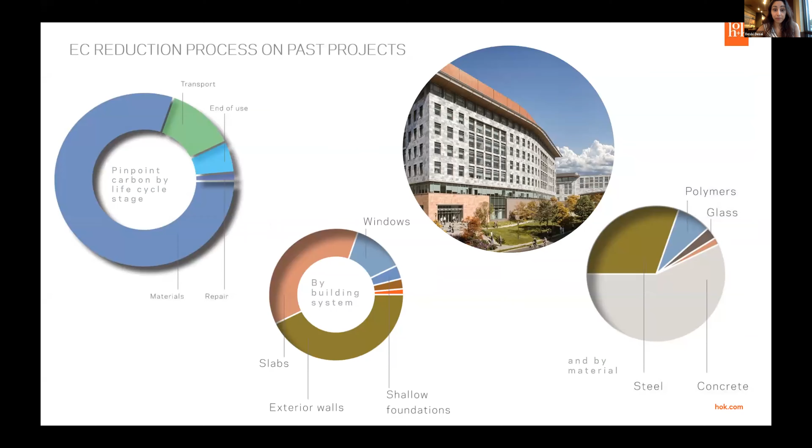And of course, it may seem we would want the highest fly ash mix. We did. But the challenge on this project was that the construction schedule was such that even a little bit of fly ash would increase the amount of time they would need before demolding or removing formwork. And that was a significant increase to the overall construction schedule. And that made us realize it's really important to discuss as early in the project as possible that you would want pozzolanic materials in your concrete, such as fly ash, because it does impact construction schedule quite significantly. So we were able to find a happy medium.

What the contractor wanted to know is what is the impact of choosing this submittal over that submittal to the overall carbon footprint, the embodied carbon of the entire project. So this helped them do that. We started from a 0% fly ash baseline, which is what the contractor had initially wanted to use to keep a very tight construction schedule and get very high early strengths, which structurally we don't need. We designed for 28-day strengths. So they wanted those high strengths really early so they could move from floor to floor really quickly.

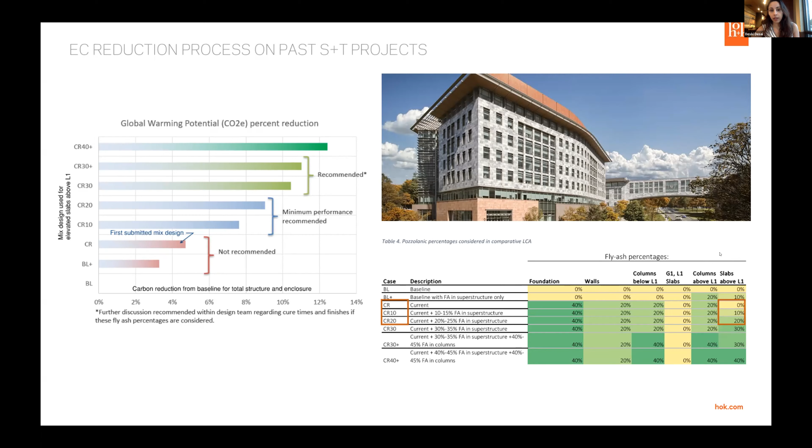But we found a great happy medium. They were able to make 25% fly ash work. So it just goes to show that doing a life cycle analysis in CA, working with the contractor, can still get you embodied carbon reductions. And they liked being included in that process as well.

There are some technologies available, such as carbon curing, which reduces embodied carbon to a similar extent that using fly ash would. So you could use fly ash and in situ carbon curing to get possibly double the carbon reductions you would get with just one of those strategies alone.

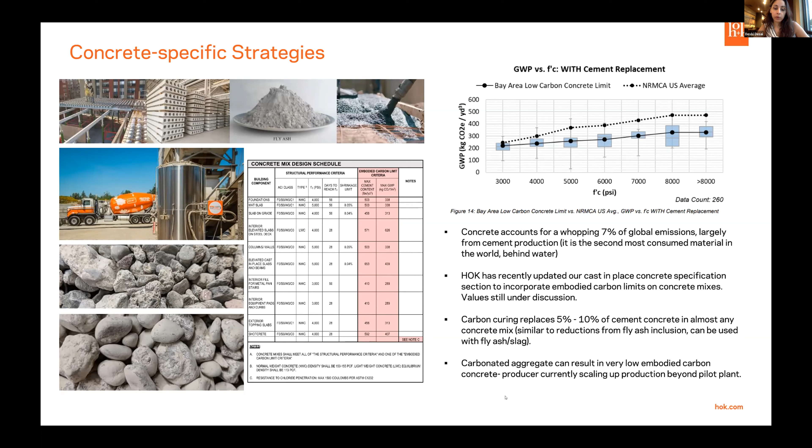There's also carbonated aggregate, which is in the pipeline. It's not quite as widely available yet, but you can get much greater carbon reductions with carbonated aggregate than you can with in situ carbon curing, but they're both really great options. So if you can use all of the above, then why not? So I would stay tuned on carbonated aggregate to see how that scales up.

Sustainability in steel. The take-home message here is it's really important to specify a minimum recycled content in your specs, because by the time a supplier is being brought on board, it might be a little bit too late to ask at that time. Oh, carbon curing.

Yes, I have a question from David about what carbon curing is. So that's when liquid carbon dioxide is pumped into a concrete mix, and that carbon dioxide reacts with the cement and the other mineral binders to form carbonated minerals. So you're essentially locking away that carbon dioxide forever in the mineral of your concrete matrix.

Carbonated aggregate is a little bit different, and that reaction happens in a plant, and it happens with the aggregate itself, which is then just brought to your local mixing facility and mixed into the concrete. So they're two slightly different processes. If you want more technical information on either of those, Carbon Cure, which is a company, their website will have more information on in situ carbon curing, and Blue Planet Aggregate, their website will have more information on carbonated aggregate.

So more about sustainability in steel. There are different furnaces that steel comes from. There are electric arc furnaces, there are blast furnaces. Typically electric arc furnaces have much lower embodied carbon. They use much higher recycled content. So by specifying your minimum recycled content in your specs, you can help ensure that the source of the steel for your project is coming from a mill with lower embodied carbon than others, because as you can see, it can vary significantly.